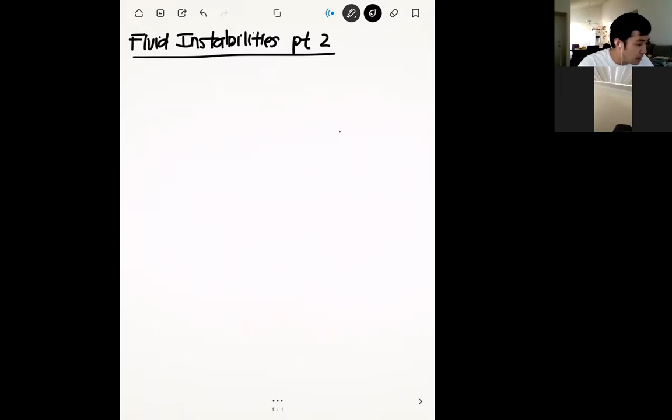So where we left off - it's been a while since we've had a lecture, because on Monday we had the midterms, we didn't have a lecture that day, and then last time I saw you guys was last Wednesday. So last time we left off, we were covering fluid instabilities. We just finished talking about the Kelvin-Helmholtz instability, which is probably one of the most famous fluid instabilities out there. The direction I want to go today is to talk about more general methods to analyze instabilities. Unfortunately, due to the complexity of the equations, we won't be able to solve a lot of these analytically, but we can talk about some heuristics and general processes we can follow. So our starting point is we're going to talk about what's called the Orr-Sommerfeld equation.

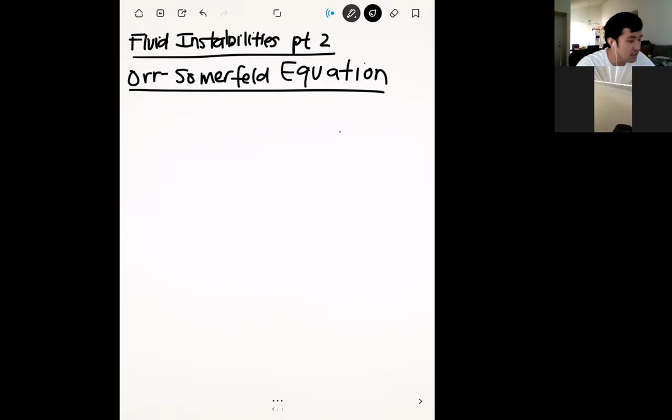So the Orr-Sommerfeld equation - basically the way we're going to do it is apply our method of normal modes to our conservation of momentum equation, directly to Navier-Stokes. Because remember from last time, when we did Kelvin-Helmholtz, we applied the normal modes method to a specialized case based on the geometry and situation we were in. So while that works great for Kelvin-Helmholtz, the equations we actually got weren't exactly due to conservation of momentum - they were more due to the boundary conditions we were imposing on the situation. So the Orr-Sommerfeld is going to be more general, but because of that, it's going to be a lot more difficult to solve. The main thing this is going to allow us to do is see how viscosity factors into instability.

Because the Kelvin-Helmholtz instability, while it's really cool, was totally inviscid, so viscosity didn't factor into that at all. The Orr-Sommerfeld equation, because it's more general, is going to allow us to see how viscosity factors in.

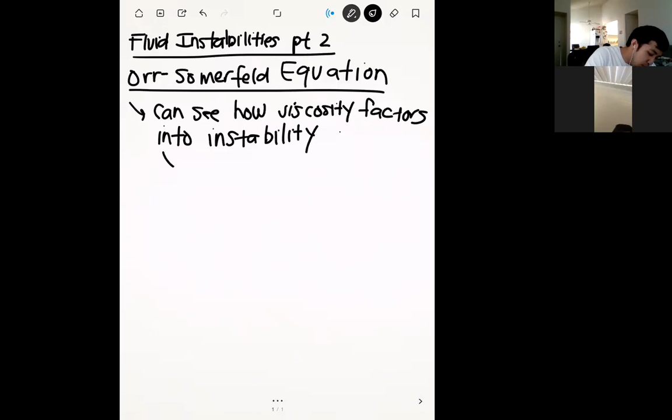It's going to be the launching point, the transition point between what we did before and turbulence, because what we'll be able to see from the Orr-Sommerfeld equation, or just from the ideas motivated in it, is how viscosity can actually be a destabilizing agent within fluid flows.

Normally what we expect is that viscosity is actually going to help stabilize our fluid flows, just because of its nature. But actually, viscosity can destabilize fluid flows, and that's going to lead directly into our discussion on turbulence. So before we start, let's talk about some assumptions we're going to make.

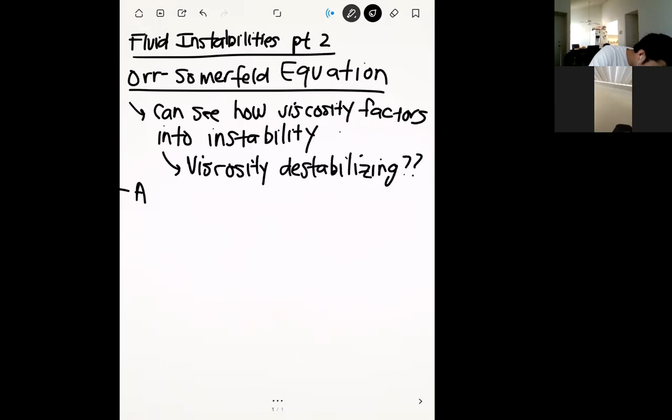Similar to what we did in Kelvin-Helmholtz, we're going to assume our velocity is only in one direction. So our velocity components, at least in our base case, only have one direction, and the dependence of the velocity is only going to be on one spatial variable.

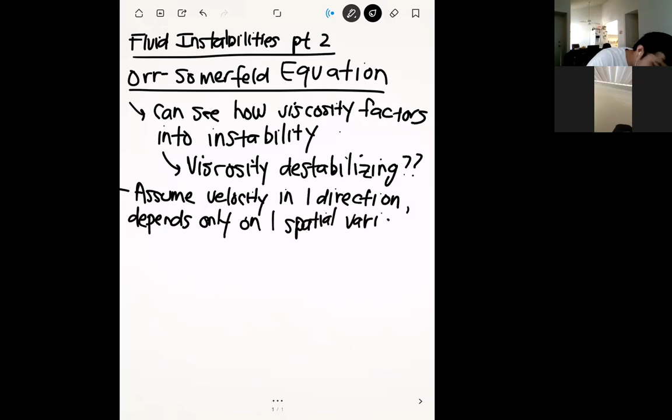One example of this would be our flow in a pipe, where if we have pressure-driven flow within a channel or a pipe, we have a velocity distribution that looks like this. Our U is only in one direction, along the pipe, and it only depends on one variable, which is Y.

And then just like we did before, we're going to assume steady state, so we're not going to have any time derivatives. This will be the launching point for us to use our method of normal modes. All right, so do you have any questions?

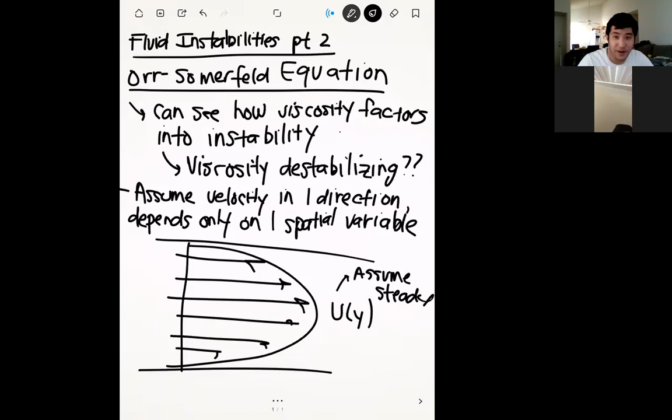Okay, we're good. Thanks. We as in just you.

So let's go ahead and apply our method of normal modes. Remember, the way that we do this is we're going to add a perturbation to our flow field.

So what that looks like is that if we take the total velocity vector, it's going to be a sum of both our base case and our perturbations. I'm going to use the same notation I used before, where capital letters denote our base flow in the background, and perturbations get lowercase letters.

So we can have a perturbation in the x velocity, and we can also have perturbations in the y and z direction, so we have little u, little v, little w. Even though our base case is only one direction, our perturbations can be in any direction.

And since we're doing this off the general Navier-Stokes equations, we also have to add a little perturbation for the pressure. So our total pressure is going to be a sum of P, the base pressure, plus the little perturbation of pressure. And so what we can do is plug this into our momentum equation.

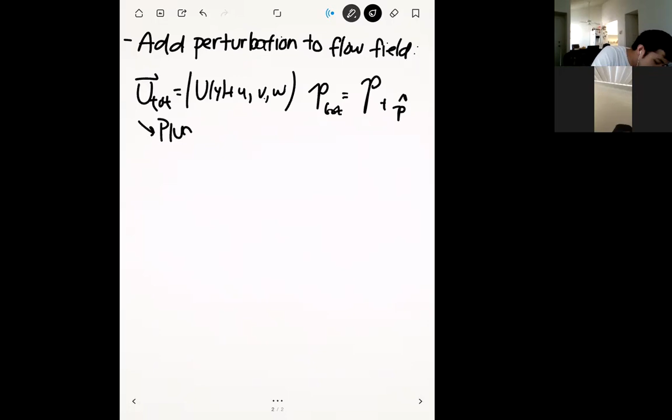So basically what I'm doing is plugging those velocity components into our momentum equation. Even though our base case was steady, you can see here that I still have an unsteady term for the perturbations, because we haven't made any assumptions on that yet.

And then to write the viscosity term in shorthand, I'm going to have it be 1 over the Reynolds number times the Laplacian of u plus u. So from here we have a lot of terms, and what we can do is distribute. I don't think this is going to fit on this page, but I can at least start it.

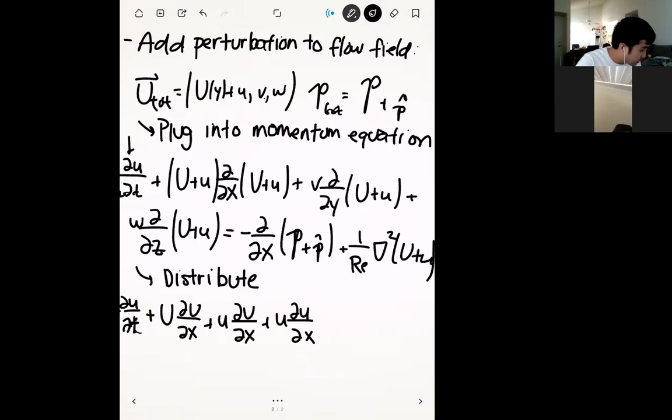Okay, so let's see, oh I need one more... let's see, oh I need u du dx.

So you can see, when we have these kind of quadratic terms, they kind of expand out to quite a few terms.

Sorry, there was a little yapping dog that just ran past my window. Or I think it's a small child, I can't tell.

Okay, so these are all the convection terms. I'll do the other terms on the other side. So after we distribute the terms, we end up with stuff like this. And so what I'm going to do is start canceling some of these terms.

I need to cancel this guy too.

So the reason I'm canceling these terms is that we're going to assume a few things. First, we're going to assume that our base flow, big U, only depends on Y. So whenever we see any derivatives of the base flow with respect to X or Z, let me cancel this guy too, then we can go ahead and cancel those terms.

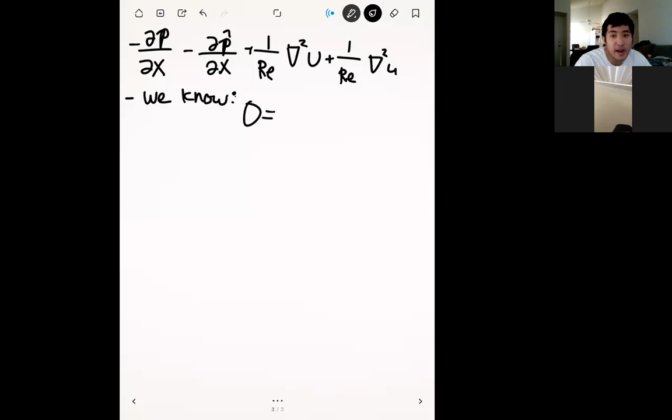Okay, so we already know that the base flow already satisfies a conservation of momentum. So we know that, before adding any perturbations, the base flow satisfies this equation.

Okay, so we already know, before we plugged in our perturbations, that our base flow is going to satisfy this. And so what we can do is use this to cancel out things in our previous equation. So our previous equation right now consists of these guys and all the terms on the previous page, so there's still a lot going on there.

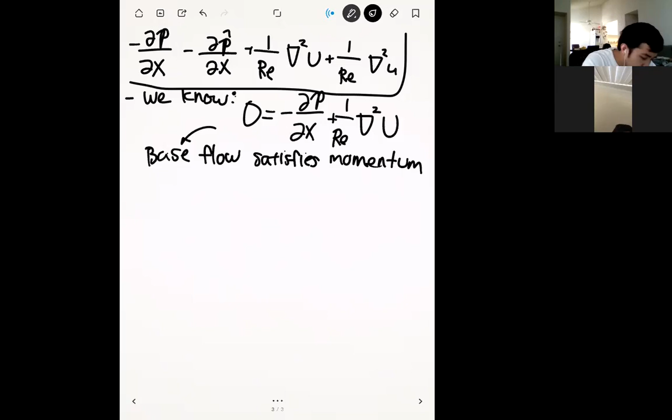But since we already know that the base flow satisfies its own momentum, we can take this term and this term, and we know that when we add them together, they get 0 because they already satisfy their own momentum. So we can cancel those from the equation, and then we end up with something a little bit simpler.

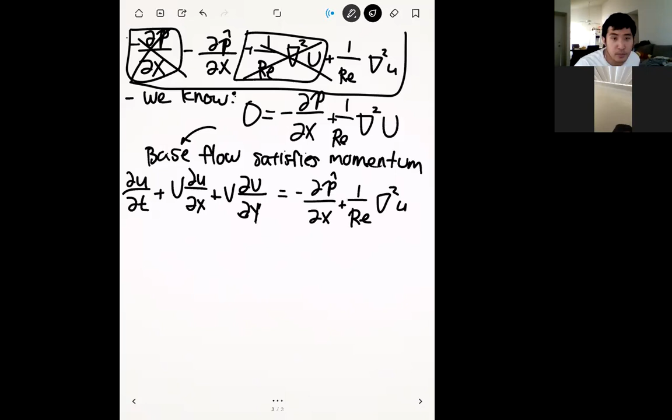Right, so in the end, after applying those cancellations and bringing in the convection terms from the previous page, we get: du/dt plus U times du/dx plus v times dU/dy is equal to minus the gradient of the perturbation pressure plus 1 over the Reynolds number times the Laplacian of little u.

So this is the equation that results from applying our perturbations to the x momentum. We can do the same things for the y and z momentum, and we get basically very similar expressions.

Let me put it in this form. So we have minus dp hat dy plus 1 over the Reynolds number times the Laplacian of v, and we have dw/dt plus u dw/dx is equal to minus dp hat/dz plus 1 over the Reynolds number times the Laplacian of w.

So we have three equations here that we can solve for our perturbation velocities. And then, just like we did for the Kelvin-Helmholtz instability, we can plug in a Fourier representation of u, v, and w.

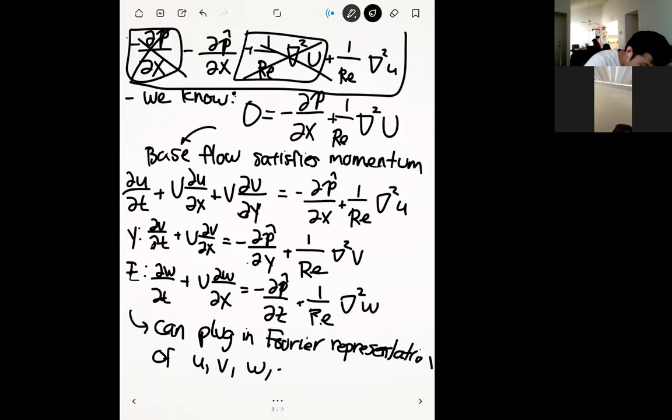And p hat. Because remember, that was our method of normal modes, where we assumed our perturbations were sinusoidal in nature. If we do that, we can solve for the growth rate of the perturbation, which was either sigma or our wave speed c.

So in the notes I have the equations for this, but it's actually not going to be useful because, as you can imagine, we have these four equations -- and conservation of mass too -- these four partial differential equations to solve for perturbations that can depend on x, y, z, and t. This is an extremely difficult problem, which you could probably solve numerically, but not by hand in a way that's useful for us.

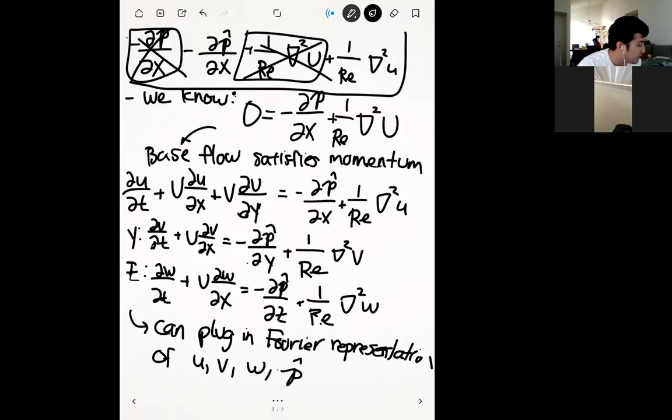So what we're going to do is apply some more assumptions to this and get it down to a form that we can use. Any questions on this? Okay.

So let's apply some more assumptions to simplify this problem, and they're not totally unreasonable assumptions either. Let's apply an assumption known as Squire's theorem. I don't know the history behind this theorem, so I don't know if it's someone actually named Squire, or if it was a knight in training who was really good in fluid mechanics and came up with this theorem.

But basically what he says is that when you're considering the stability of a 3D problem, which is what we have right now since we have disturbances in u, v, and w, what he determined -- and the proof is in the book, or you can easily find it online -- is that if you took a 2D problem with the same dimensions as the 3D one, the 2D one is inherently more unstable.

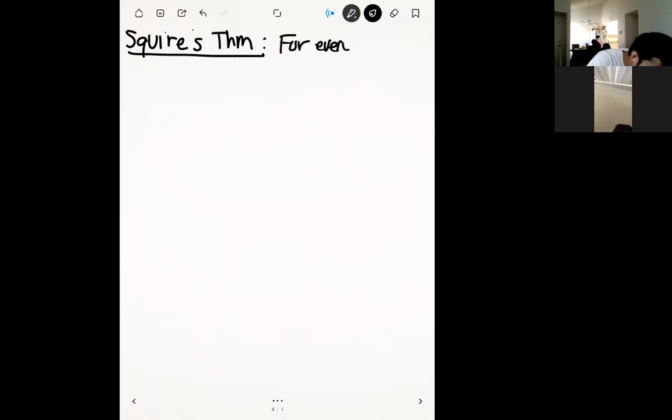So what he basically says is: for every 3D unstable problem, or instability problem, there exists a more unstable 2D problem.

That's nice because right now we have a 3D problem, which is really difficult just because there are a lot more unknowns. But by using Squire's theorem, we can say let's just disregard the third dimension and consider a 2D problem, because that's going to be more unstable.

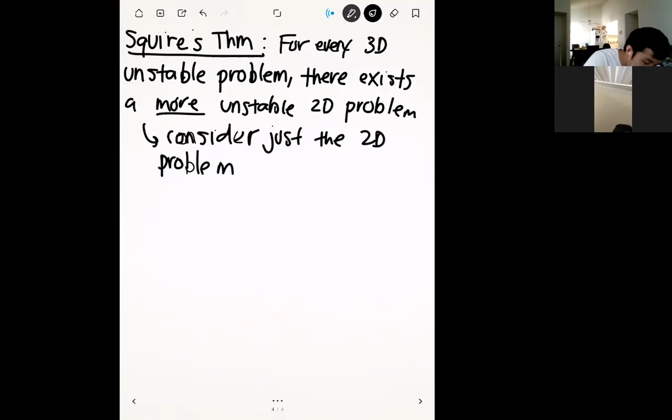In other words, we're going to use Squire's theorem to ignore the z component. So we're basically just going to consider the flow in x and y.

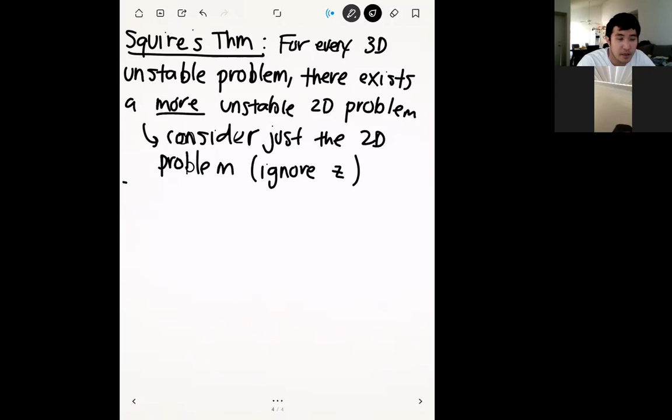And by doing that, this helps us out quite a bit, because now that we have 2D flow, we can make use of a friend we've used quite a lot in this class: when you have a 2D flow, instead of solving for both the x and y components of velocity -- u and v -- we can solve for what's called a stream function.

So remember, the stream function is a scalar variable psi. And once we know psi, we can actually solve for the velocity components.

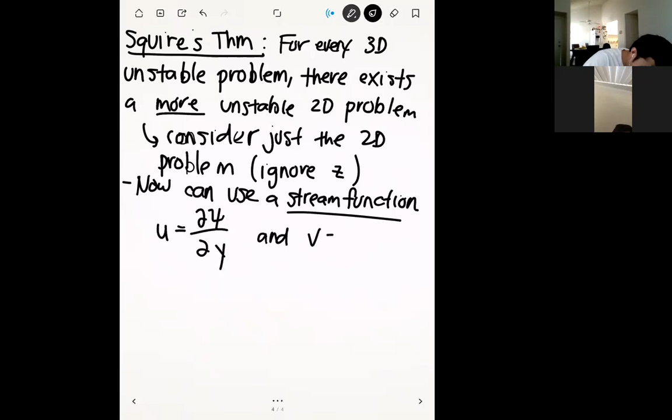Okay, so we can say that u is equal to d psi dy, and v is equal to minus d psi dx. This helps us out quite a bit, because it means we only have to solve for psi instead of for u and v separately.

Basically, the point of all these assumptions is to reduce the number of variables that we solve for, because every time we reduce the number of variables, our problem becomes exponentially easier.

Now that we have things in terms of psi, recall from Kelvin-Helmholtz that's kind of what we did too, putting things in terms of a scalar function. So when we introduce disturbances, we can introduce the disturbance as a perturbation stream function.

This is the function we'll plug in. Our perturbation stream function is going to be the magnitude of the disturbance. The magnitude of the disturbance has the same functional dependence as our base flow. Since our base flow is only a function of y, the magnitude of our disturbance is also going to depend on y.

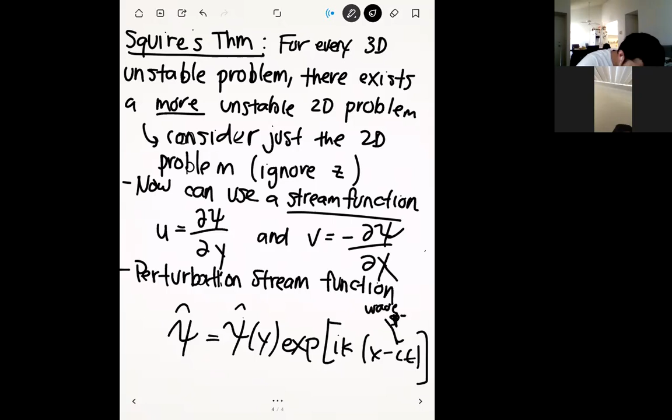And then we multiply by an exponential of ik times (x minus ct). Here, k is the wave number of the disturbance, which determines the spatial frequency, and c is our wave speed. Since c is in front of t, in front of time, c is what we're ultimately most interested in, because that's going to tell us whether our situation is stable or unstable.

So then what we can do is plug this stream function into our momentum equations and conservation of mass, and we can finally arrive at the Orr-Sommerfeld equation. Are there any questions on this before I turn the page?

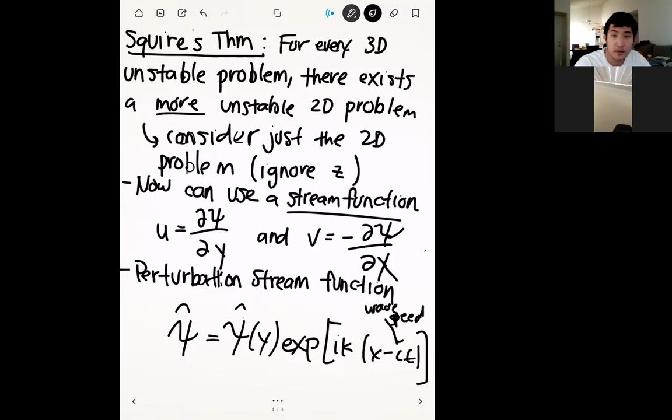When you actually go and plug it in and work it out, it's a lot of algebra, which I think isn't as useful for the class, so I'm just going to give you the final result.

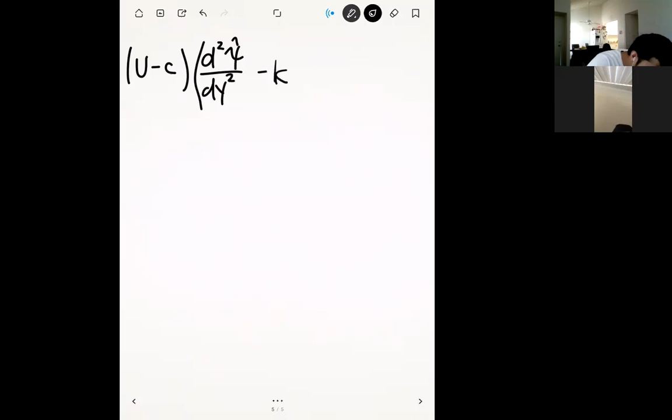So the final result is (U minus c) — remember, big U here is our base flow, and c is our wave speed — times d squared psi hat dy squared, minus k squared psi hat, minus psi hat times d squared U dy squared, is equal to 1 over ik Re.

This is our viscous term, times d to the 4th psi hat over dy to the 4th, minus 2k squared d squared psi hat dy squared, plus k to the 4th psi hat.

So this equation that I've boxed right here, this is the Orr-Sommerfeld equation. Of course, this is a 4th order differential equation, so you need lots of boundary conditions on psi.

Even though it's an ordinary differential equation and it's linear, which are both very good things, you can see that this is very difficult to solve in practice. No one really solves this by hand anymore — usually people solve it using a computer.

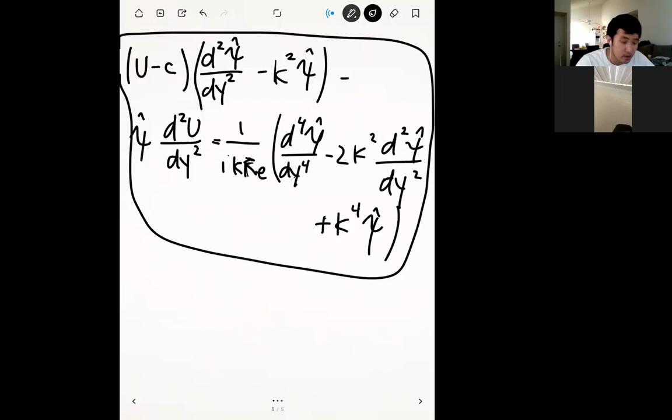Even though we're not going to actually solve this equation in this class, I think it's important to know where it came from, and to know how we're going to use it going forward. So next to ik, this right here is the Reynolds number.

Let me make this a bit more neat. So this last term in parentheses here came from the viscous term — that's 1 over the Reynolds number right there.

And so what we're going to do first, now that we have this nice equation, is consider some limiting cases. First, we're going to assume the flow is inviscid, so we'll let the Reynolds number go to infinity, and then see what results from the equation and what conclusions we can draw that are actually useful for calculations. Any questions on this?

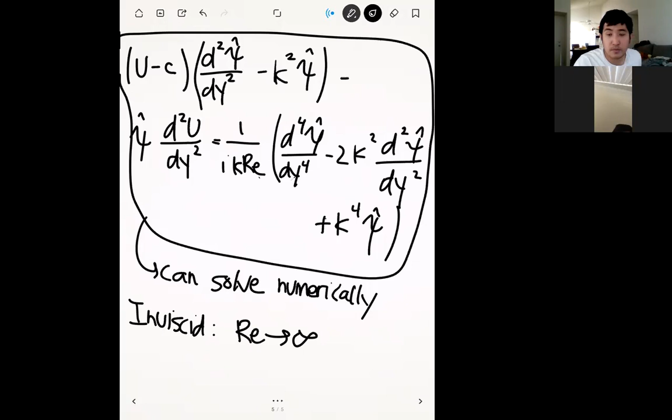So if we let Reynolds number go to infinity, this is basically going to give us an inviscid situation, so there's no viscosity. So this is inviscid stability of parallel flows.

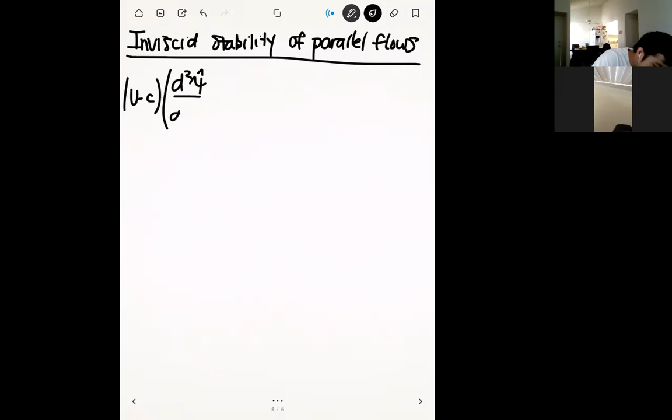So by making that assumption of letting Reynolds number go to infinity, that simplifies our Orr-Sommerfeld equation, because then we have U minus C times d squared psi dy squared, minus k squared psi, minus psi times d squared U dy squared.

And so when you apply that assumption, this equation, or the form of this equation, has a special name. This is called the Rayleigh equation.

Since we don't have viscosity anymore, the flow that follows this equation is going to slip at any solid boundary. Because we don't have viscosity, there's no way we can apply no slip, but that's okay.

If you've taken an advanced mathematics class, you know that when you look at this equation, you should see that this basically forms an eigenvalue problem.

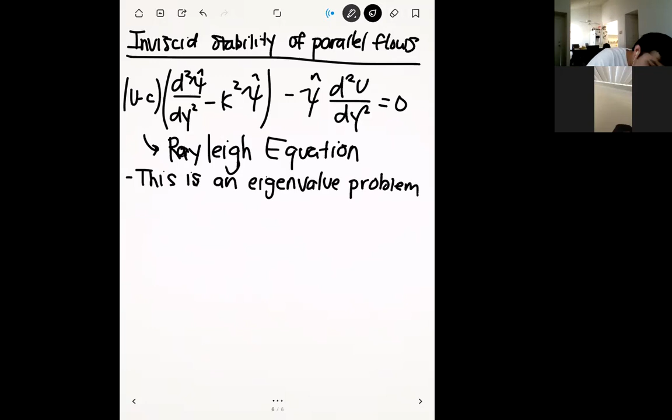This isn't a math class, although sometimes it can feel that way, I know. We're not going to actually solve this eigenvalue problem, but if you just know what those are and what we're solving for, that can help you understand what's going on.

Whenever you have an eigenvalue problem, you're solving for two things simultaneously. You're solving for the eigenvalue. It's important to define what that is for this problem. The eigenvalue for this problem is actually going to be the wave speed.

Which is good because C is what we're interested in, because depending on the behavior of C, that's going to tell us about the stability of the situation. And then the disturbance psi, that's going to be our eigenfunction.

So these are a pair. Whenever you're solving eigenvalue problems, you're solving for both, because these things are paired where a certain eigenfunction psi is only going to be a solution for its corresponding eigenvalue. But that's just the mathematical background, because all we're interested in is just C. That's all we care about.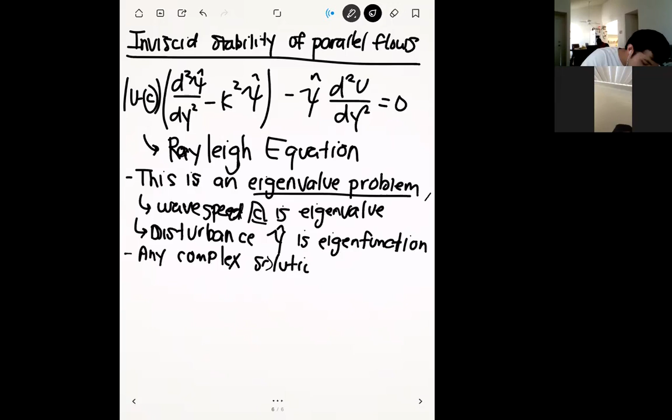Because of the nature of the solution of eigenvalue problems, whenever you find a solution for C, C can be a complex number. And if you find a solution to the eigenvalue problem for some complex number C, then just by the properties of the eigenvalue problem, its complex conjugate will also be a solution.

So that means if we have C, which is equal to C real plus i Ci, is a solution, then C equal to C real minus i Ci is also a solution to this problem.

If you recall when we were discussing the wave speed form of the normal modes method, we know that whenever we get a wave speed with a positive imaginary component, where the imaginary part of your wave speed is positive, then we know that we have an unstable solution.

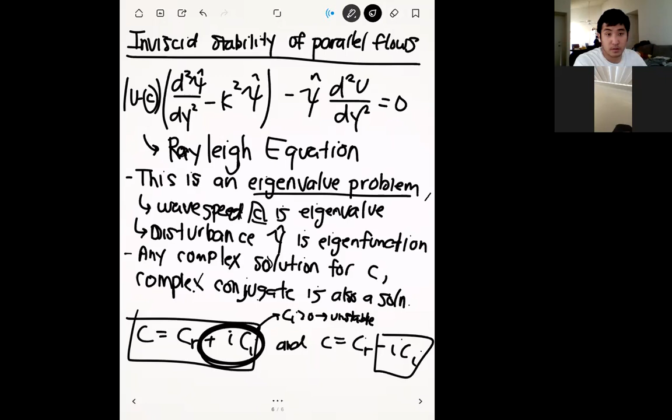Let me just write down what I just said. So the only way that we get a stable solution is if our imaginary part is equal to 0. But this is only for inviscid flows.

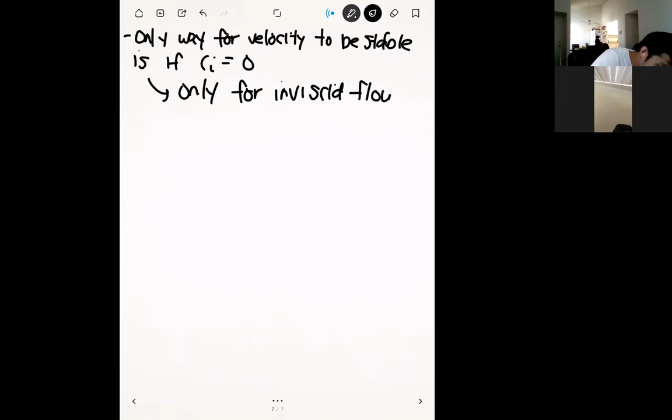So if you can solve the eigenvalue problem and you get your solution for the wave speed, and you get the imaginary part equal to 0, that's the only way for this to be stable. But all of that is very abstract math stuff. So what are some things that you can actually use in practice, or for problems in this class, more specifically?

I want to talk about two important results that come from the Rayleigh equation. The first is another criteria, named after Rayleigh: the Rayleigh inflection point criteria.

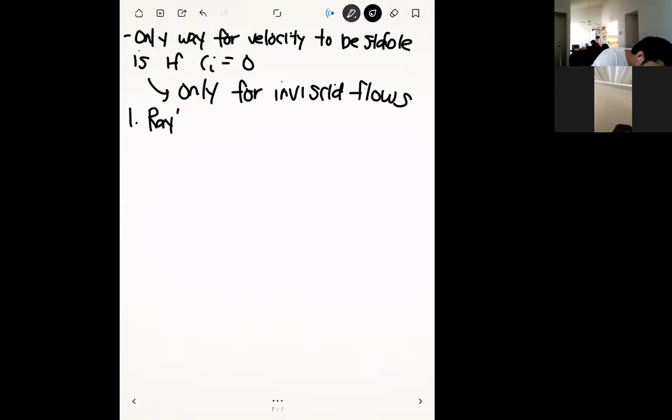This kind of goes back to when we were talking about turbulent boundary layers and separation. Rayleigh's inflection point criteria states that in order for there to be an unstable flow, a necessary but not sufficient condition is that there has to be an inflection point somewhere in the flow.

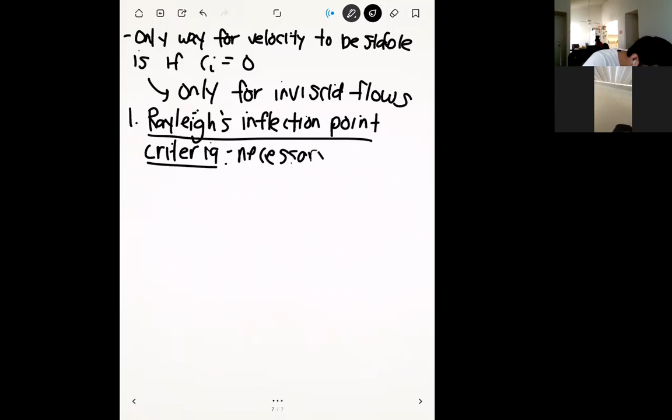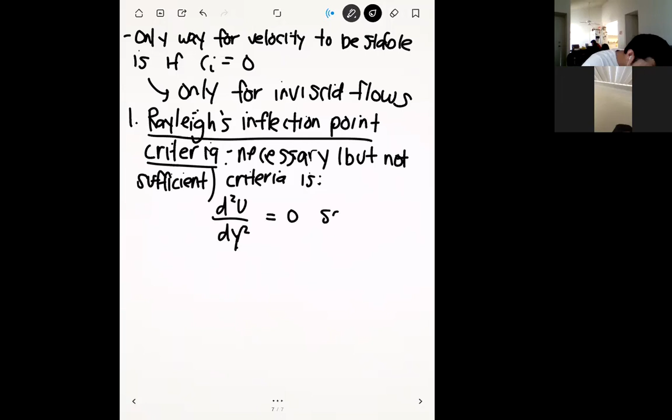An inflection point basically says that the second derivative of the velocity has to equal 0 somewhere. So if you have d squared u dy squared equals 0 somewhere, then Rayleigh's inflection point criteria is satisfied, and it's possible to get instability there.

The key words here in this criteria are necessary but not sufficient. Just because you have an inflection point in your flow doesn't mean that it will be unstable, but it is a first requirement. So if your velocity profile does not have any inflection point, then Rayleigh's criteria says that without viscosity, there's no way for it to turn unstable. But the opposite isn't true - just because you have an inflection point doesn't mean you're unstable. But if you have no inflection point, then you're definitely going to be stable.

That's useful a little bit, but it's not as useful because there are actually a lot of flows out there that have an inflection point but are still very stable. So later on, Rayleigh's inflection point criteria was improved upon by a researcher named Fjortoft. So this is Fjortoft's theorem.

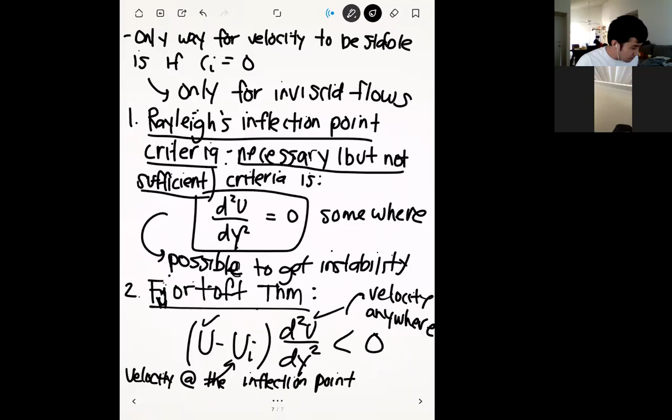So using Fjortoft's theorem, we can come up with a general list of flows that are generally stable and flows that are generally unstable. So this is generally.

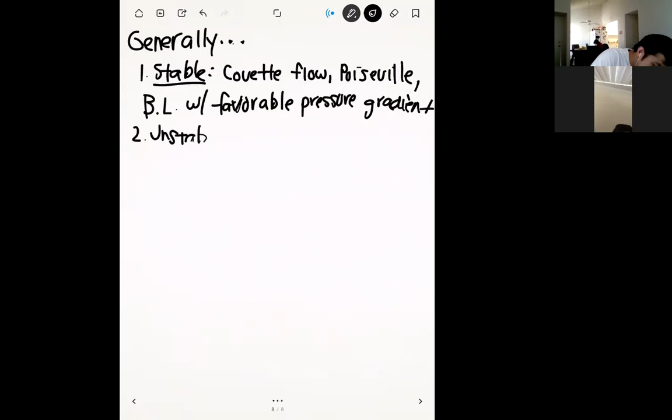Generally, flows that are stable are flows like Couette flow, Poiseuille flow, and boundary layers with a favorable pressure gradient. So if the flow fits into one of those categories, it's generally going to be stable.

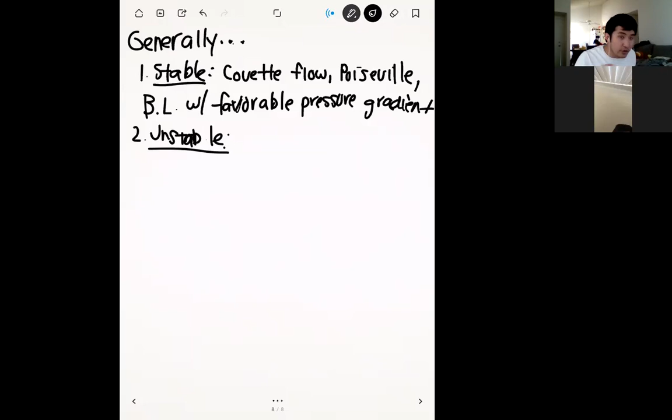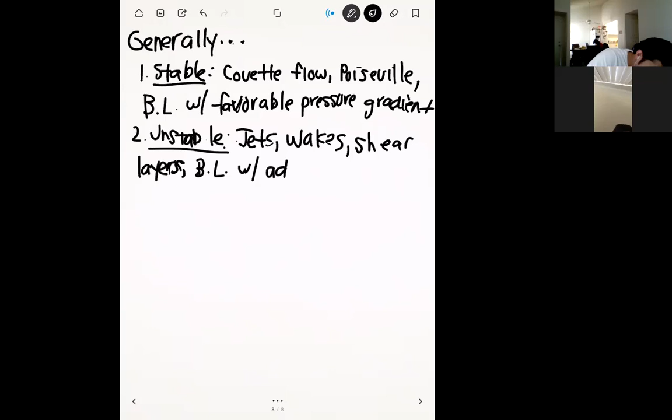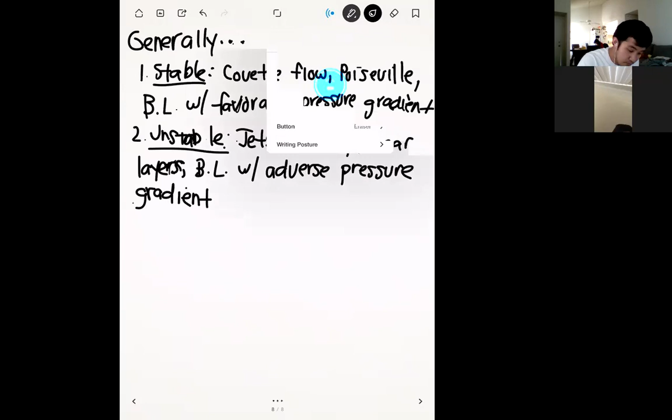So we can come up with a list of flows that are generally unstable using this criteria. This would be jets, wakes, shear layers, and boundary layers with an adverse pressure gradient. So if your flow falls into these categories, then it's generally going to be unstable.

So that's all the theory for inviscid stability. So now what about viscous flow? That's kind of the theme of this class.

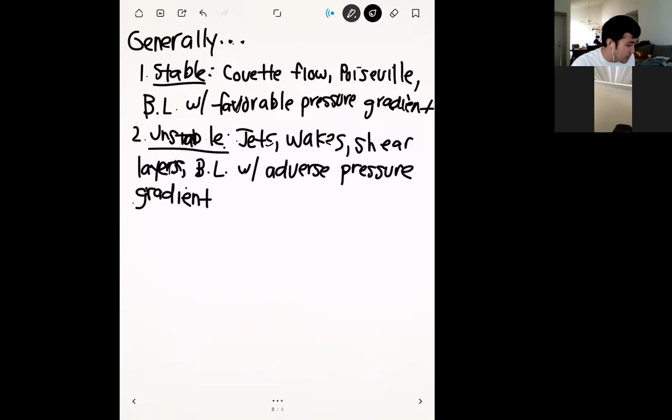So kind of like what I led off this section with is that generally viscosity is going to be something that stabilizes your flow, because viscosity tends to dampen out any kind of sharp gradients, and because of that it tends to take these perturbations and suppresses them. So generally viscosity can be stabilizing, but there are some cases where it can be destabilizing, and that kind of leads us into turbulence.

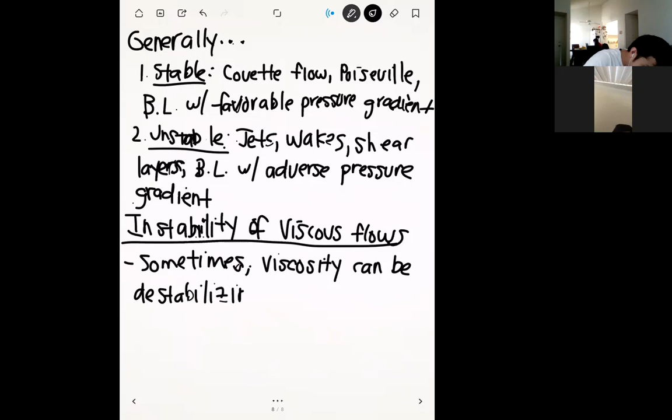Just some examples of this: we already know, when we studied boundary layers, that once the Reynolds number exceeds a certain amount, like especially for the Blasius boundary layer, our situation is going to become unstable. The reason this happens is because viscosity actually can contribute to instability. In a nutshell, the way that viscosity does that is it provides a mechanism, or provides a form, for these perturbations to steal energy from the base flow.

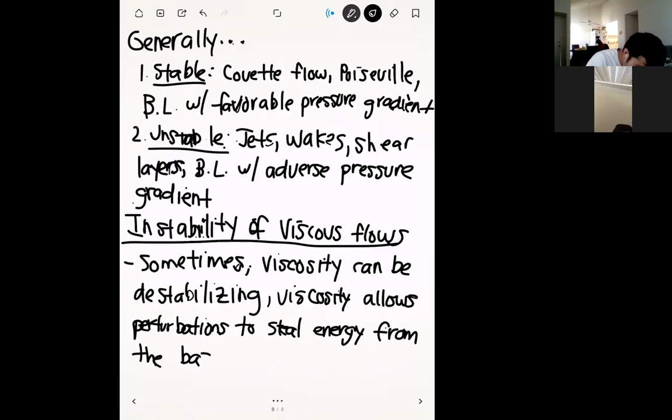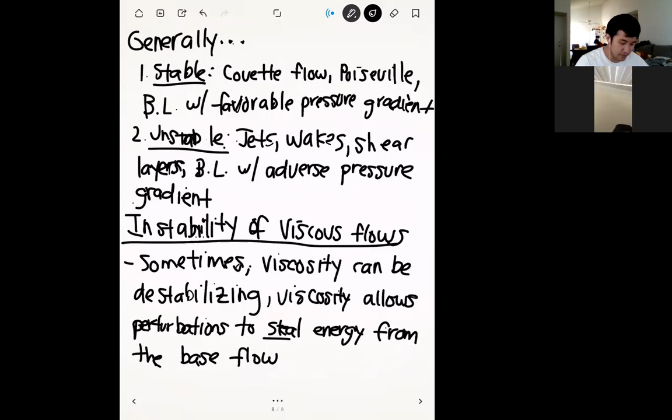Guys, remember, viscosity is a lot of things, but the main thing that viscosity does for fluids, when we talked about unsteady laminar flow, is that viscosity is an agent to diffuse or transfer momentum. What tends to happen is that viscosity can take the momentum or energy from the mean flow and transfer that into these perturbations. And then as these perturbations get more energy, that's what causes them to grow and become unstable. Okay, so let's see how that actually works out.

I'm going to write an equation here. I'm not going to derive it, but it's not too difficult to understand. Basically it's a control volume expression, which expresses the rate of change of energy or kinetic energy of the disturbances.

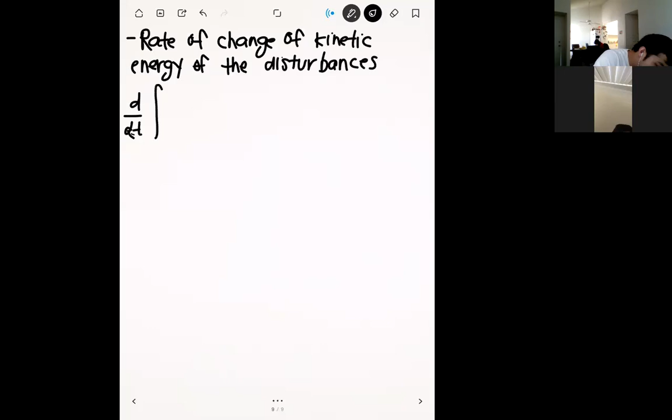So that equation looks like this: d/dt of the integral of 1/2 times u squared plus v squared, dV. This is a control volume analysis, so we're integrating over a volume, minus little u, little v, times du/dy, dV, minus nu, viscosity, times the gradient of u squared, dV.

Let me label these terms. This term is term 1, we'll call this one term 2, and we'll call this one term 3. Term 1, because we have the d/dt on the outside, this is the total rate of change of disturbance kinetic energy.

And so ideally, for a stable solution, that quantity, the total rate of change of the kinetic energy, should be negative. Because if that change is negative, that means that the perturbations are losing energy over time, and thus they're going to eventually go away. So that's what we have in a stable situation.

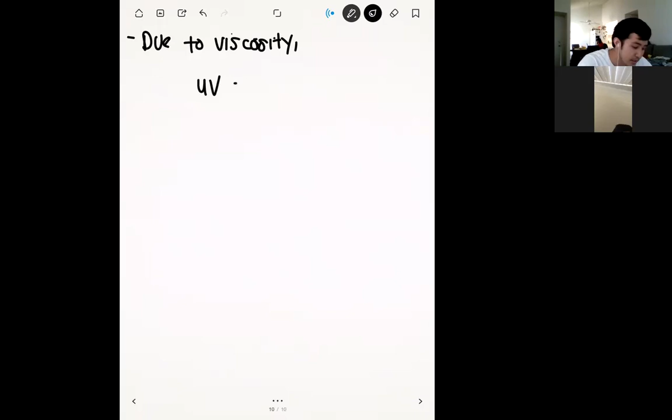Okay, so due to viscosity, we have something that can be interesting. Due to viscosity, this term right here, u times v, which is the product of two disturbances, this can actually be negative.

And so because this can be negative, what can happen is that you have a positive integral on the right-hand side and a negative integral. And if the effect of the positive integral is bigger than the negative one, this is going to lead to a positive growth of kinetic energy.

So if integral 2 from the previous page overwhelms integral 3, then what happens is that it results in a net increase, or net rate of increase, of kinetic energy.

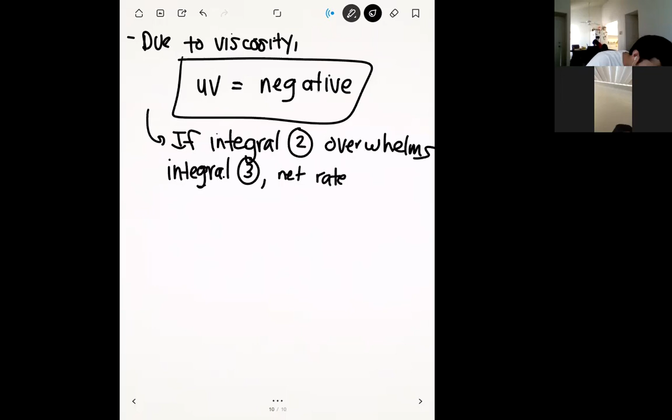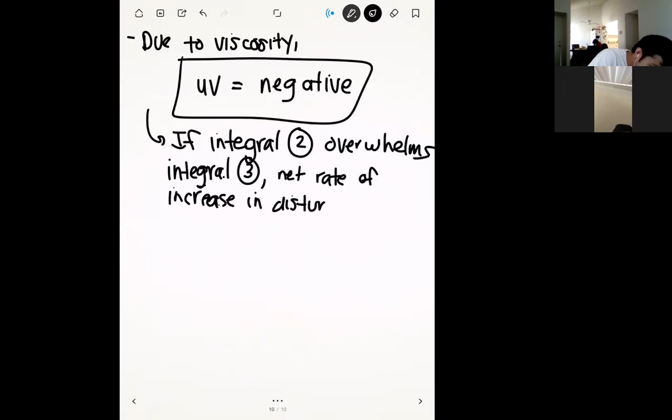If we have a net increase of kinetic energy, then we know that the perturbation is going to grow over time, and then we're going to get an unstable situation. The product of these two disturbances actually has a special name, which we're going to go over a lot next week - these are called the Reynolds stresses.

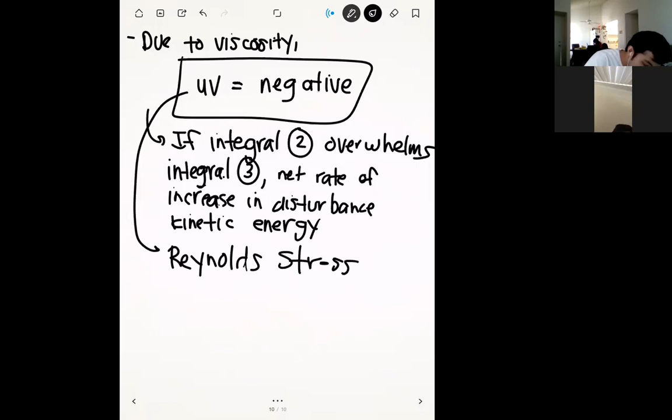The Reynolds stress is basically just a product of two perturbations, random perturbations. They can go in any direction. And then due to viscosity, what can happen is that the Reynolds stresses can actually steal energy from the base flow.

The mechanism that allows it to steal that energy is viscosity, because viscosity provides a way for momentum to be transferred within the fluid. So if viscosity can transfer momentum for the base flow, it can also transfer energy and momentum from the base flow to the disturbances.

If this happens enough, then the disturbances will grow in energy and start to become really unstable. In particular, it's the interaction between shear, big du/dy, and the Reynolds stresses that will produce this effect of the disturbances stealing energy.

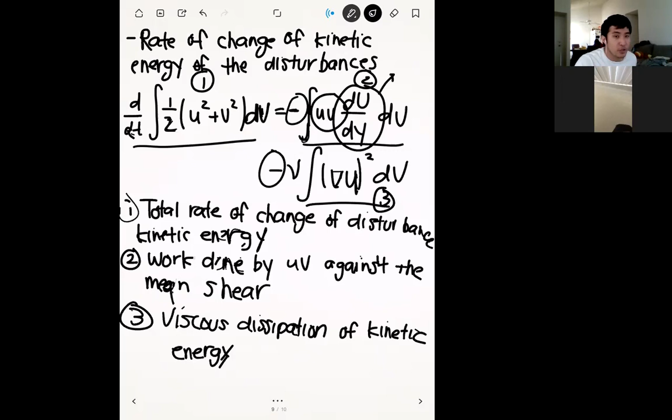Viscosity is the main thing that causes our velocity gradients to be pretty high. Velocity gradients result from viscosity being present in the fluid, and because we have velocity gradients, that provides a mechanism for these disturbances to steal energy from the mean flow. When that happens, these disturbances will grow in time, and eventually the flow will become unstable.

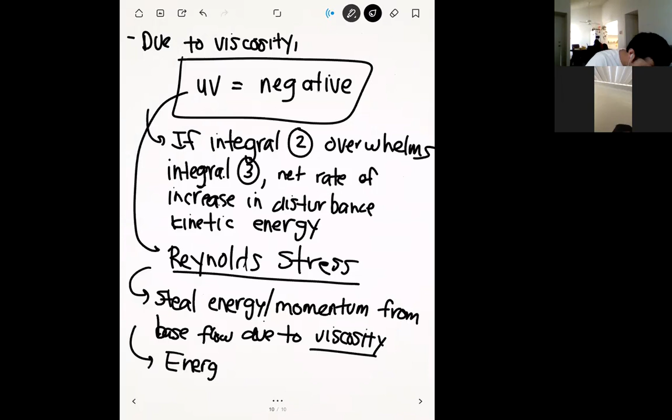This phenomenon of small disturbances stealing energy from the base flow or main flow is known as the energy cascade.

I want to introduce the term now because this is something we'll be talking a lot about next week in turbulence. Remember this phenomenon of small flow structures or small perturbations stealing energy from the main flow through viscosity - that's called the energy cascade, and it's one of the central ideas behind turbulent flow. Any questions on this?

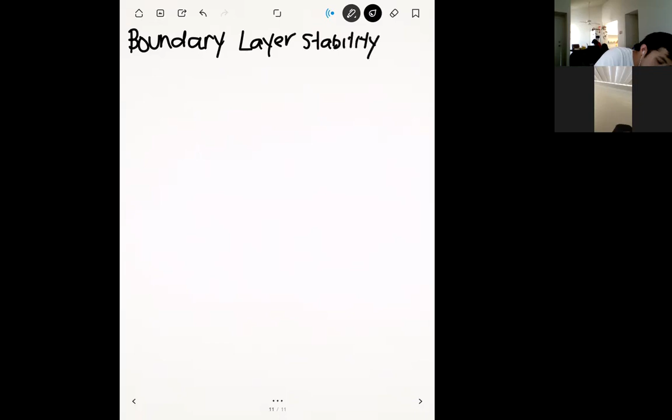So the last concept I want to touch on for instability is boundary layer stability. It's kind of been hinted at up to this point, but we know that when we talk about instability of a boundary layer, what we're actually talking about is separation.

If a boundary layer separates, that's basically a result of an instability happening in the flow and growing with respect to time. So boundary layer stability and separation are two sides of the same coin - two different ways to talk about it and analyze it, but the result is the same: you have a boundary layer that separates and becomes chaotic, and you have a wake, and usually that's a bad thing.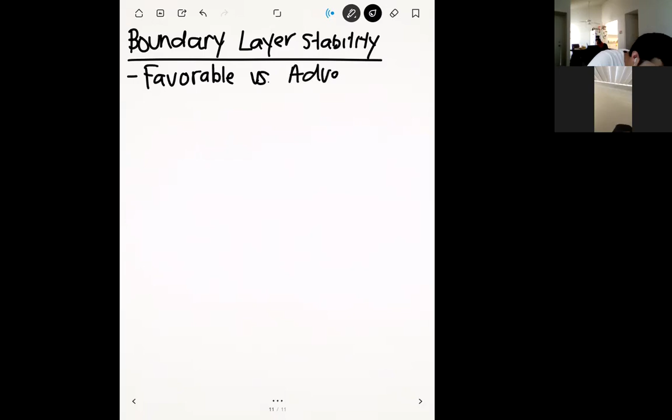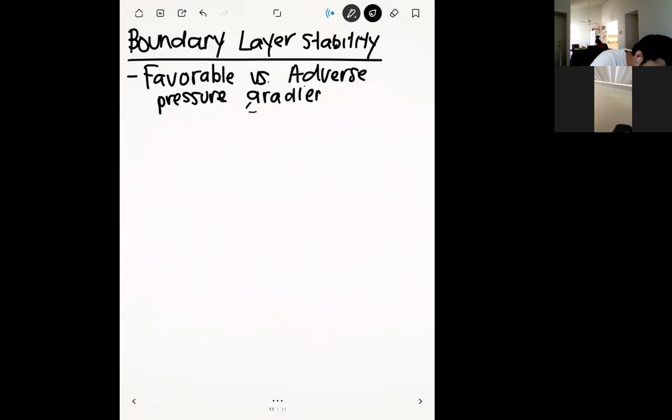When we talked about boundary layer separation, we talked about two situations: cases where we have a favorable pressure gradient, and we contrasted that with cases where our pressure gradient was adverse. A favorable pressure gradient is when pressure is decreasing in the direction of flow, and adverse is when the pressure is increasing in the direction of flow.

Often the stability of boundary layers - you'll see these kinds of curves in the literature when you see reports of boundary layer stability over an airfoil or any kind of geometry. You'll see them often summarized in what's called a neutral curve, or sometimes they're called thumb curves because they look like thumbs.

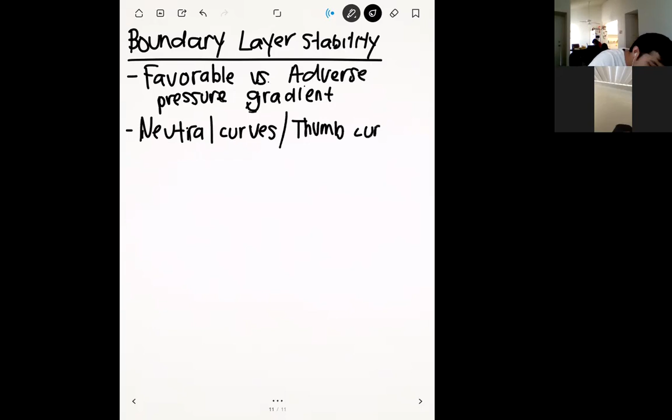Okay, so they look something like this. Let me draw the curve for an adverse pressure gradient first, and then I'll explain the different features of the curve, and then overlay the curve for a favorable one. Actually, let me just draw two separate curves, because with both on there at the same time, it gets a bit confusing.

So these curves, the x-axis has the Reynolds number. On the y-axis we have this quantity k delta, where delta is the thickness of the boundary layer, and k is the wave number of the disturbance, or the spatial frequency of the disturbance. So it looks something like this.

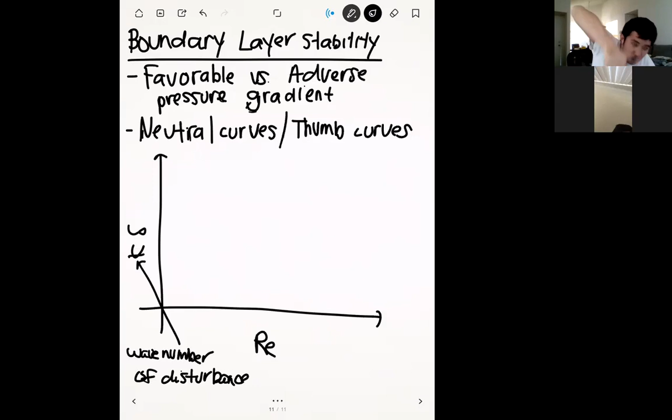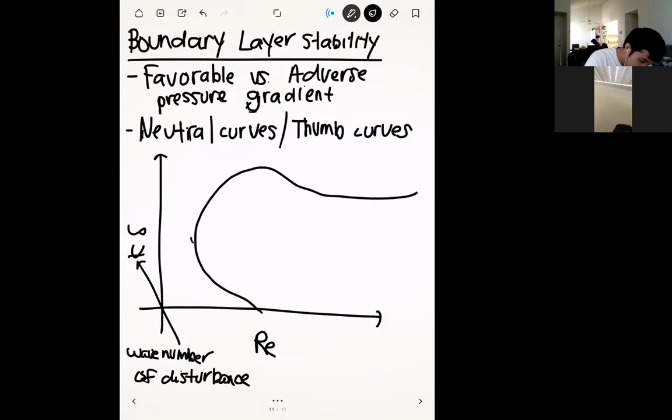It really looks like you put your thumb and kind of pushed it onto the paper. Okay, so let me draw out the regions.

And so the way to interpret this thumb curve, the first thing I want to draw your attention to is this guy right here. You'll notice the curve, with the x-axis defined as the Reynolds number, the leftmost part of the curve, where it sticks out the most on the left - if you draw a vertical line down to the x-axis, that's your critical Reynolds number. Remember, the critical Reynolds number is where turbulence, instabilities, or separation start to occur.

And you'll notice that it only occurs for a disturbance of a certain frequency. This disturbance is only going to occur for a k delta value that's intersecting at that axis there, because at this Reynolds number, if you have a value of k delta that's either up here or down here, you're not going to get a disturbance. So what this tells you is that the first disturbances that occur in a boundary layer occur at a very specific spatial frequency, together with the thickness of the boundary layer.

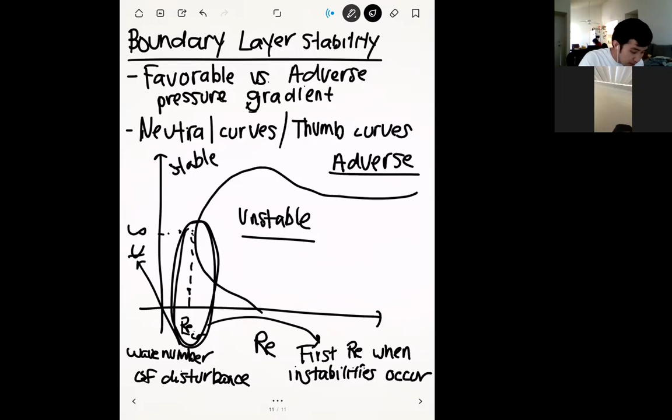Besides that, the other thing I want to draw your attention to is this area of the curve right here. You can see that once our Reynolds number gets really, really high, we have this area of the curve that flattens out - I didn't draw it that well, but it should flatten out like this. So what this tells you is that at high enough Reynolds number, you're always going to have some kind of instability in the flow. The reason for this is that when you have an adverse pressure gradient, there's going to be some inflection point in the flow.

And what we talked about earlier is that whenever you have an inflection point, that's a good indication that you might go unstable - particularly for this case where Reynolds number gets really high, because we know that when Reynolds number gets really high, the viscous effects get really low, so it's mostly inertial effects dominating. We saw that those two criteria we went over, the Rayleigh inflection point criteria and Fjortoft's theorem, were strictly for inviscid flows. Inviscid flows have a Reynolds number that's really high, so this is consistent with those theorems - if you have inviscid flow and an inflection point, it's very likely you're going to have instabilities that grow over time.

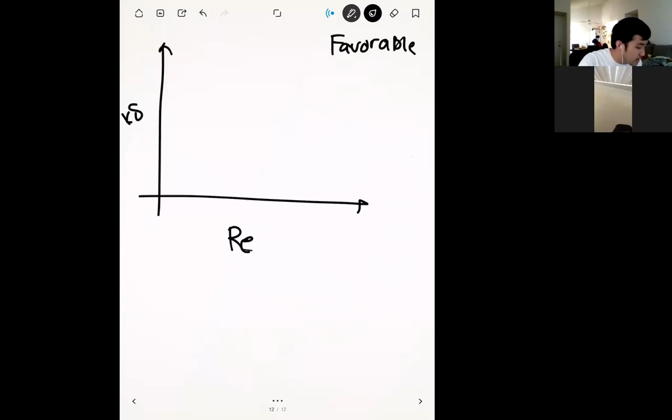Okay, so our axes are the same. We have Reynolds number on the x-axis and K delta on the y-axis. So for a favorable pressure gradient, it'll look like this.

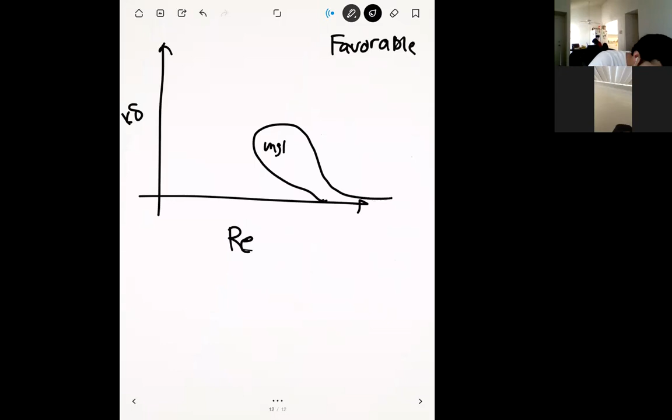So we have a much lower unstable region because the favorable pressure gradient tends to keep things pretty tight, so these instabilities won't grow. And just like we saw for the adverse case, we also have a critical Reynolds number. And the thing is, if you have a favorable pressure gradient, then the critical Reynolds number which triggers instability will be higher.

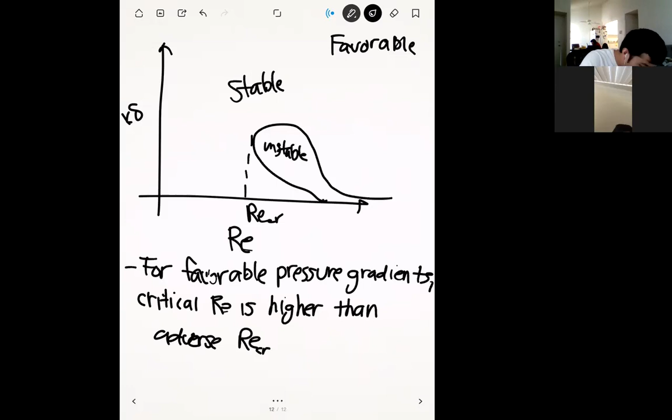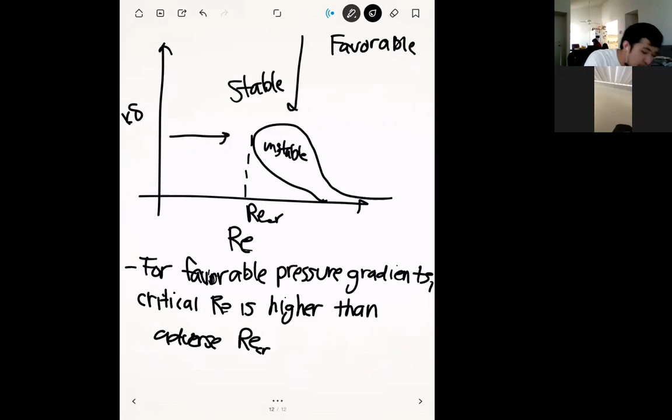Because the favorable pressure gradient is going to help you keep the boundary layer attached and keep it laminar. So you can't really see it, but I tried to draw it on the right here: when you have a favorable pressure gradient, it tends to take your curve for the adverse case and push it to the right and smush it down like that.

The other thing I want to draw your attention to is the behavior at high Reynolds number. For the adverse pressure gradient, we saw that if your Reynolds number is high enough, then you're always going to get instability. That's because the adverse pressure gradient will cause an inflection point in your flow.

But if you have a favorable pressure gradient, that tends to prevent inflection points from happening. So actually, if you have a favorable pressure gradient and your Reynolds number is high enough, that's actually going to keep your boundary layer attached.

This is a fact that aerospace engineers use to design their wings, so that if they're in this regime of Reynolds number that's high enough and they have a favorable pressure gradient, they don't have to worry so much about the boundary layer separating, because having your boundary layer separate over something like an airfoil is really dangerous — that's what causes stall, and that's what causes airplanes to basically fall out of the sky.

So, any final questions on this? Right, so the question is, for the case of zero pressure gradient, would that be considered adverse or favorable?

So these curves, I just gave you two examples, but depending on how adverse or how favorable, these curves can definitely move. It's not like a switch where it turns from an adverse pressure gradient like this one to a favorable one like this one. There are definitely degrees, so depending on how favorable and how adverse they are, these curves can either grow or shrink accordingly. A lot of times these curves are obtained through experimental measurements.

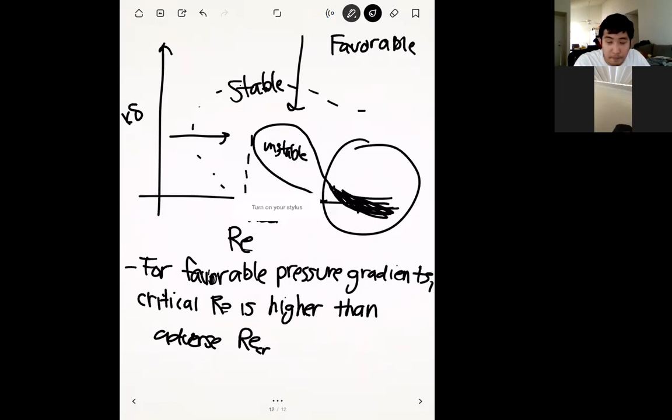Sure, what's up? Sure. Mm-hmm.